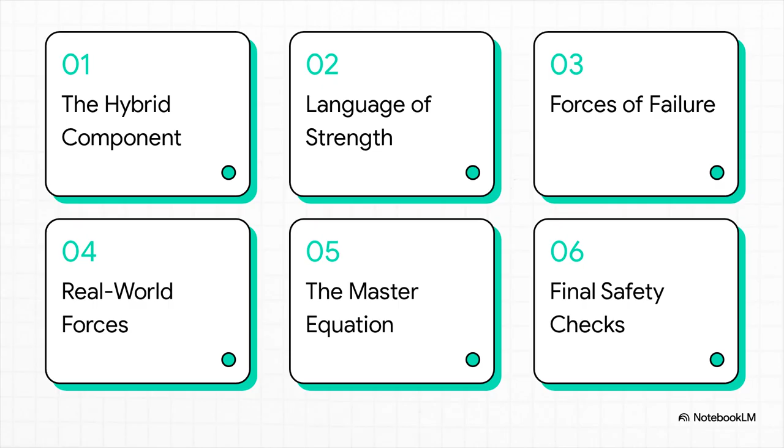So here's what we're going to cover. First up, we'll meet this amazing component that's doing double duty. Then, we're going to learn the basic language of strength. You know, force, stress, all that good stuff. We'll get into all the ways things can fail: bending, twisting, and buckling. Then we'll see how these things get attacked from all sides in the real world, and we'll reveal the one unified equation that solves it all. And finally, we'll walk through the last safety checks that make sure everything is absolutely solid.

Okay, I know this sounds like the start of a bad joke, right? A massive tower of steel and glass and a little plastic ruler you've got in your desk drawer. But the answer to this question actually gets to a really fundamental principle of all structural engineering. And the answer is a thing called a beam column. It's this structural hybrid, a real workhorse. It's designed to resist being crushed straight down like a column and being bent sideways like a beam. And get this, it often has to do both at the exact same time. It's the key to how both that huge skyscraper and that tiny ruler manage forces.

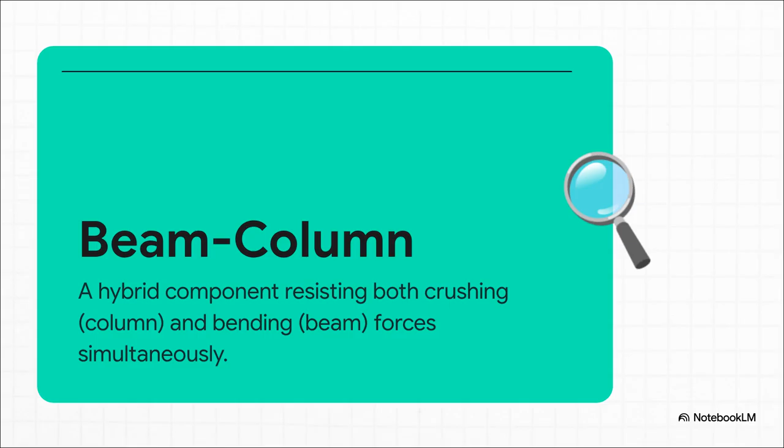All right, let's dive into our first big topic, the language of strength. Because before we can really get how engineers solve this incredibly complex puzzle, we've got to learn the vocabulary they're using. We have to learn the lingo. So let's start with the absolute basics. Everything, and I mean everything, starts right here with this one concept, force. In engineering, it's really just a simple push or a pull. That's it. Simple, direct, and it's the source of every single challenge a structure is ever going to face.

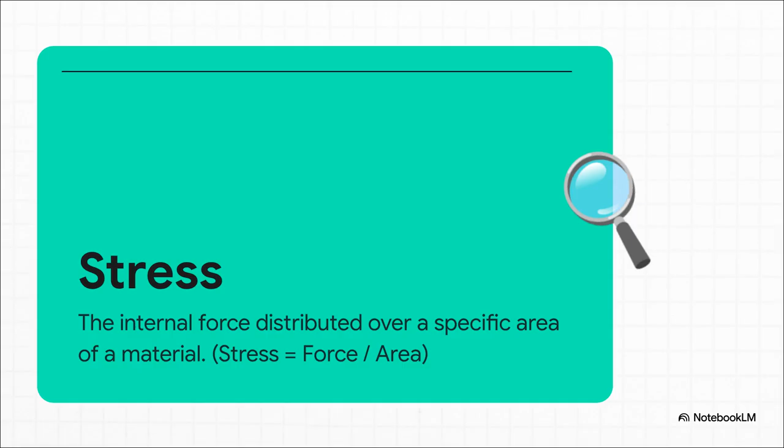Okay, now let's build on that. A force is just a push, right? But stress is all about how concentrated that push is. Think of it this way. The force from someone standing on snow might be the same, but the pressure from a snowshoe is totally different from the pressure of a stiletto heel. That's stress. It's the force divided by the area it's acting on.

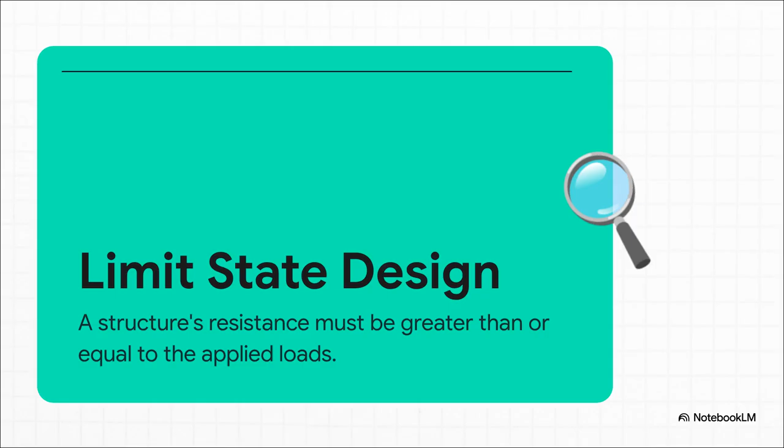So how do we make sure buildings are actually safe? Well, engineers use this philosophy called limit state design. The rule itself is simple. A structure's resistance, its strength, has to be greater than any loads you throw at it. But here's the really brilliant part. To create this huge safety margin, they actually do their calculations with exaggerated loads, while at the same time assuming the material is weaker than it actually is. They are literally designing for a worst-case scenario that will probably never, ever happen.

Now that we've got the vocabulary down, let's get into what happens when you actually apply these forces. This is where we start to see the real challenges pop up in bending, twisting, and buckling. Remember our ruler? Hey, if you've got one nearby, go ahead and grab it. You'll notice right away it's super easy to bend it along its thin edge. But now, try to bend it along its wide, flat face. Yeah, it's almost impossible. This simple little action perfectly demonstrates a core concept in beam design.

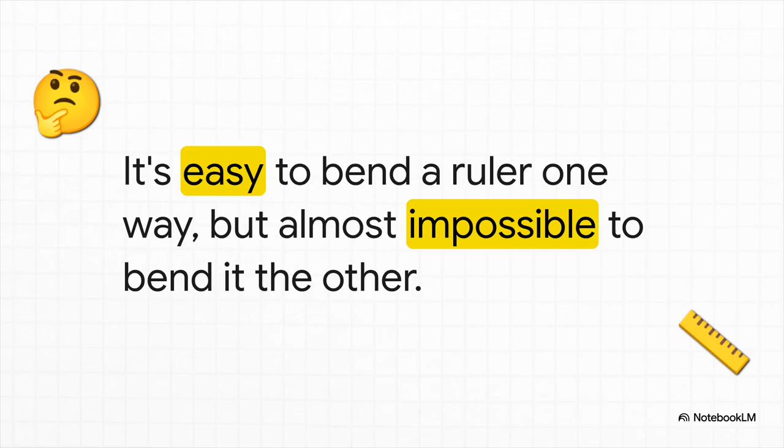What you're feeling there are the two different axes of a beam. Bending it the hard way, that's called its major axis. That's its strong direction. Bending it the easy way is the minor axis. And the reason for this is something called moment of inertia. Think about it like a figure skater spinning. When they pull their arms in, they spin way faster. When they stretch them out, they slow down because their mass is spread out.

Well, it's the same idea. The ruler is stronger on its major axis because more of its material is extended out from the center of that bend.

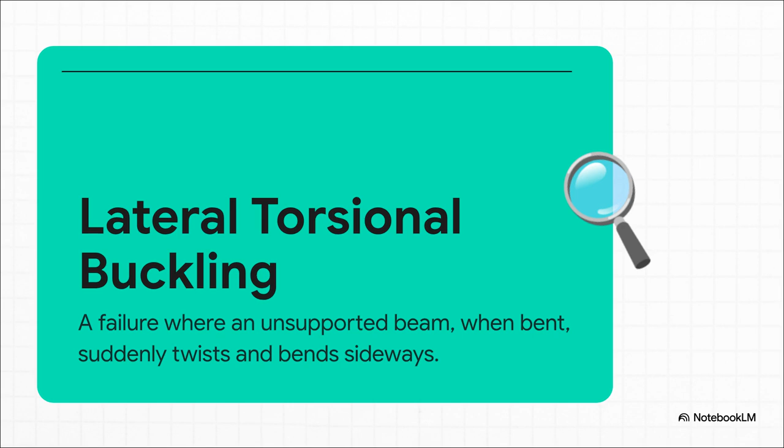Okay, but here's where things get really tricky. If a beam isn't supported properly along its length and you put a load on it, it can do something totally unexpected. Instead of just bending straight down, it can suddenly twist and kick out sideways. This is called lateral torsional buckling, and it's the sneaky, catastrophic way for a beam to fail that engineers always have to be on the lookout for.

You know, life for a beam column in a real building isn't simple. It's not just one clean force coming from one direction. The reality is, it's constantly being attacked from multiple sides all at once. So, picture a corner column in a skyscraper. You've got beams connecting to it from two different directions, right? Let's say north-south and east-west.

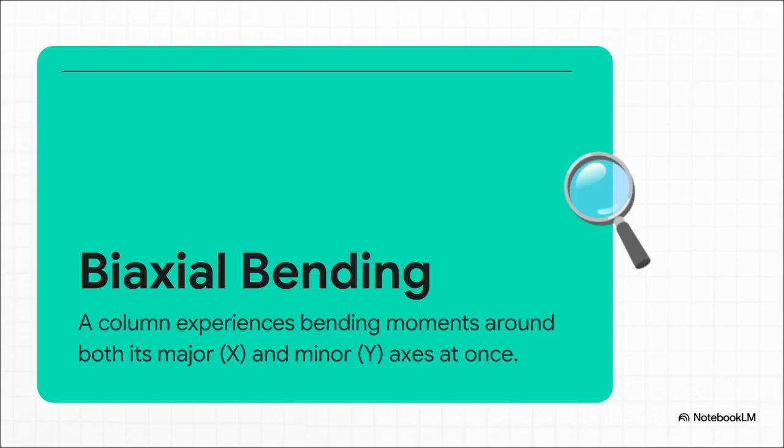Well, each of those beams is trying to bend that column, and this creates a situation called biaxial bending. It's this incredibly complex stress where the column is being bent around both its strong and its weak axes at the exact same time. So how on earth do you calculate for that? You've got a force trying to crush it, and you have forces trying to bend it in two different directions all at once.

But hold on, we're not quite done yet. Just running that one equation isn't enough. To ensure total structural integrity, an engineer has to check that the beam column passes this test for every single possible way it could fail. And there are 3 critical failure modes they absolutely have to check.

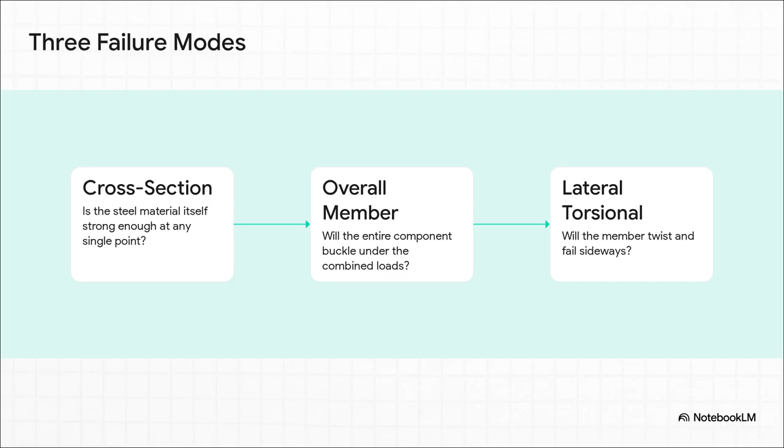First, is the steel itself just strong enough at any given point? That's the cross-section check. Second, will the member as a whole buckle under the combined load? That's the overall member check. And third, will it do that sneaky sideways twist we talked about, that lateral torsional buckling?

And here's the bottom line. The engineer has to run that same interaction equation 3 separate times, once for each of those potential ways it could fail. The design has to get a pass, a result less than 1, on all 3 checks. Only then is it considered truly, completely safe. It's an incredibly rigorous process that leaves absolutely no stone unturned.

So we've just unpacked the incredible science that keeps our tallest buildings standing strong. It's this whole hidden world of forces, resistances, and these surprisingly elegant equations. And it really makes you wonder, doesn't it? What other invisible engineering is at work all around us, just silently keeping our world from falling apart?